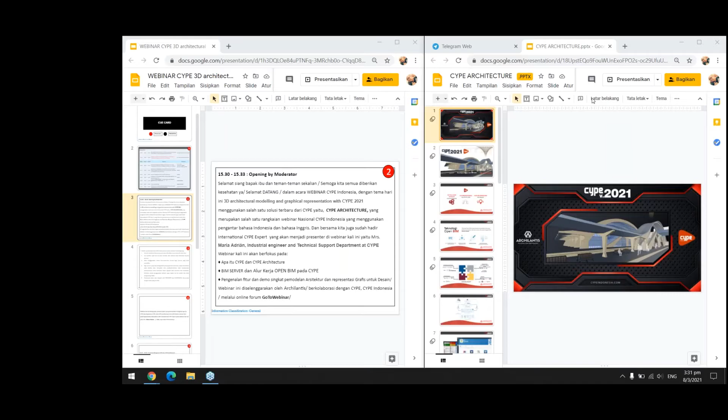Okay, it's okay. You ready? Can we start? Yes, I'm ready. Okay, whenever you want. So we start, yeah? Maybe in 5 minutes, if you want to wait 2 minutes. Okay, in 5 minutes we will start. Okay.

We are recording now. Second.

Okay, we are waiting while people log in. We will start in 2-3 minutes. Okay, fine. Yes, okay, 2 minutes.

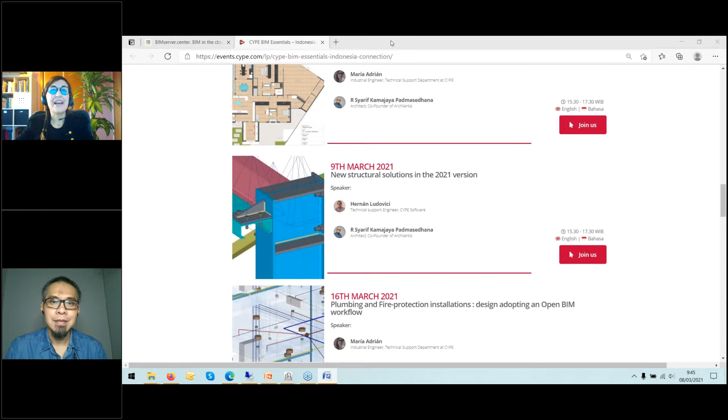One second, sorry, I have a technical problem here. Our architectural modeling program. Then we will talk about Open BIM Layout, whose main objective is to generate the dimensions and provide the layout of technical drawings using BIM.

First of all, I would like to show you how to download the programs. As you see in my desktop, I have CYPE Architecture and Open BIM Layout. But how do we get these applications or these programs that are completely free?

First, the only thing you have to remember is this address, write it again: BIMserver.center. If you come here, you will have access to our store. We press here, and then of course we can change the language. I'll change to English. All right, and here, if we write

architecture, we will find CYPE Architecture. We press here, and check it out. Here we have download. We only have to press here and download it.

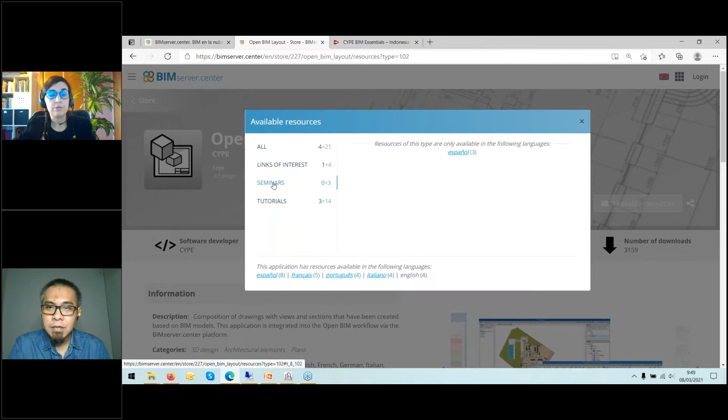Then if we press here, available resources, we have some videos explaining tips on how to do certain steps, if the tutorials have been made before.

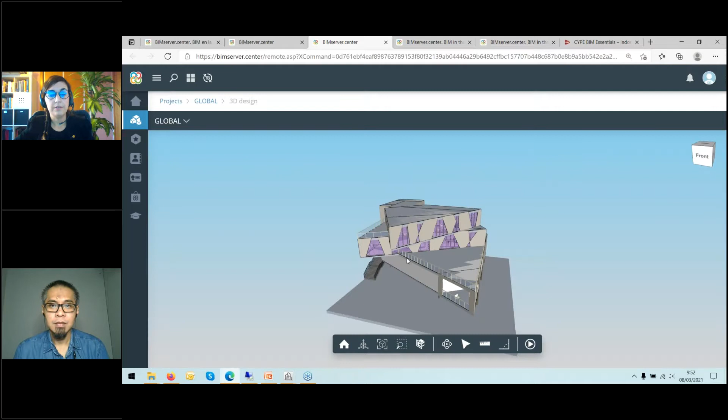If I press here on the name of my project, we can see here the 3D, and it has two IFCs, the one of the architecture, which I did myself from this part. I exported it from the CYPE architecture to the BIM project.

And then my colleague was doing the structure. So I can make it visible, see it at the same time, or maybe I want only one or the other part, make it transparent the way I want.

This, of course, can be shared with other collaborators. What I mean is that this project has a work team. In this work team, for now, it's myself and my colleague Hernan, who has the assigned area of structural analysis. But I could invite another user.

This user could be somebody from my suggested contacts, my list of contacts that I have in my account.

Or I could have different roles, I define the participation. They can be a guest that can only see but cannot make any change, or maybe I want a collaborator, editor, or moderator that can do anything. Depending on my objective, I can have more or less guests or moderators.

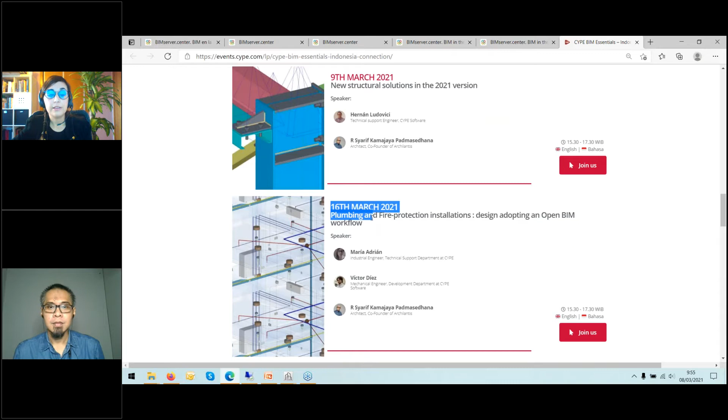So we'll continue with the examples. Just to make sure of the meaning of this, it will travel to the project and we will be able to see it in other programs, in the other applications. That's a part of the furniture. Let's go now to the sketch and architecture.

The sketch part is the CAD part, the drawings. You will find the tools you expected in a drawing program, like SketchUp or something similar. Talking about the tools: you have lines, arcs, quadrilaterals, circles, ellipses, polygons, and operations like extrude, intersect, copy, symmetry, things like that.

The sketch part is for when you are thinking about the building, or it can be where you draw elements like trees, cars, elements that are going to be shown in the model but not used for calculations.

Only for the plans. Maybe one example of the use of a sketch can be like this. I was doing some trials about a skyscraper just for fun, just an idea of what the sketch part is. When you're thinking about the building, you're interested in the shapes. In this example, I didn't create every floor—I was only interested in the shape it was going to have.

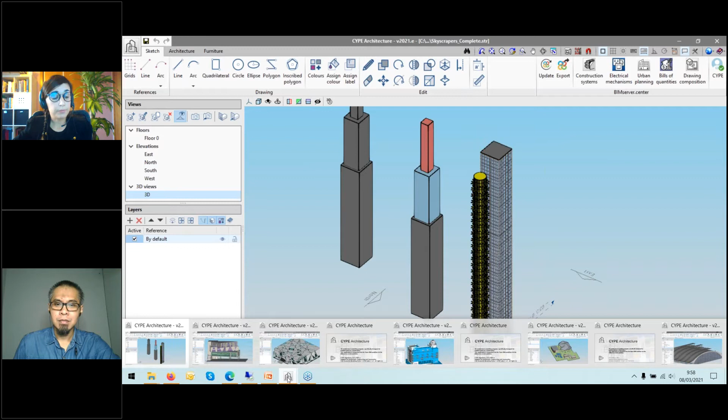That could be the result if I only do the sketch. Another example of the use of a sketch is for an architectural tender, something like this example—this is the Serpentine Pavilion. This example was done almost exclusively using the sketch.

In the layers, we can check this by pressing the button that shows or hides the sketch. If we do this, we'll see that almost everything here is a sketch. Only the stairs and the furniture are not a sketch. But it's fine if my goal is to make something that can be shown and used, for instance, for making this kind of blueprint.

I'll show it in one second. I prefer the Acrobat Reader, the way it displays with Acrobat Reader. Sorry about this, I have two screens.

Imagine I want to do something like this. This is done with the two programs I'm going to show today. The model was drawn in the sketch part, and then this was made with OpenBIM Layout—perfectly creating the sections, different 3D views, and things like that. So that could be the use of only a sketch.

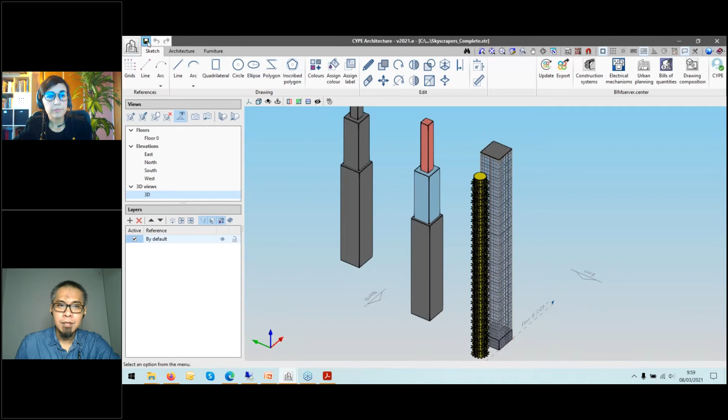Let's close these windows. You get a general idea of what I mean about the sketch. That could be that kind of example.

Then, in other occasions, we're interested in the sketch part, but also in the architecture. When we talk about architecture, we are not talking about drawings anymore—we are talking about construction elements, spaces, which means the building process is not finished with this step, but we want to continue with this model.

For instance, if I want to do thermal analysis, I want to calculate the loads of the spaces. In that case, I have to take care of the building—the composition of the wall, the volume of the spaces, this kind of thing.

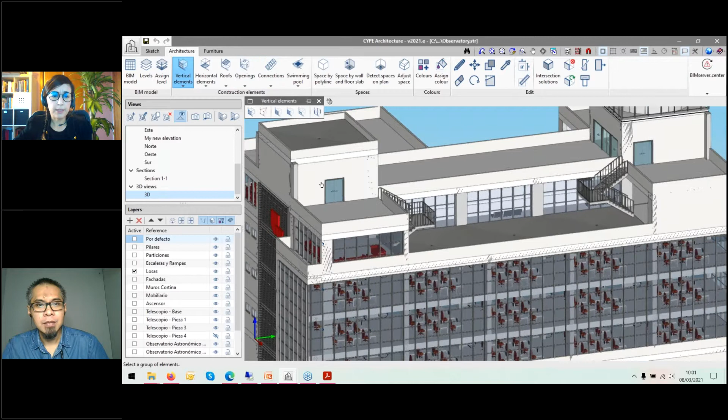So one way of working with this program is to begin with the sketch and then convert the elements of the sketch into architectural elements. In this example, we have used both the sketch and the architectural elements—we use the sketch as a help, which helps us draw the architectural elements.

Just a little view so you can see the kind of elements we can create—curtain walls, and all this. We edit, close like that. Just a general idea, okay, the railings.

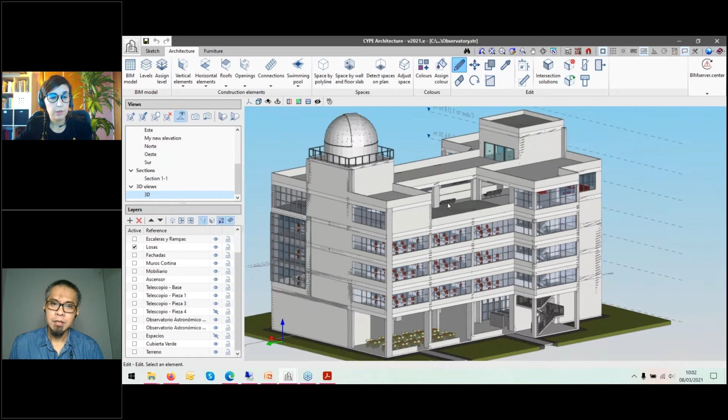Of course, in this program we have options like copy, which allows us to create one floor and then copy it as many times as we wish, so we can go faster. Just a general idea of what's possible to do with this. We can create these different sections and work in the different floor plans.

This is another example. Sometimes it's very helpful to use first the sketch, but then convert it to architectural elements.

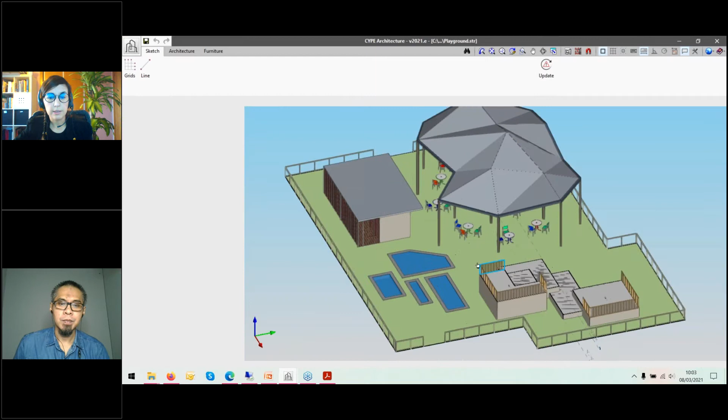Another example, like in architecture, as well as vertical elements, horizontal elements, and that, we also have swimming pools. In this case, it's nice, the kind of railings - you see the shapes that can have this kind of element. Well, only an overview of this.

I wanted to show you this in order to explain better what you get if you do this. This studio I'm going to use many times during the seminars, so we'll get back to it - we'll know this one day. This is the example I showed you before.

Here when we export it, let me try to explain what I mean by the IFC we get. In this example we use a sketch, but if we make it not visible, we can see the structure, the elements of architecture. So when we create, for instance, a wall, these properties are the properties that the IFC is going to have.

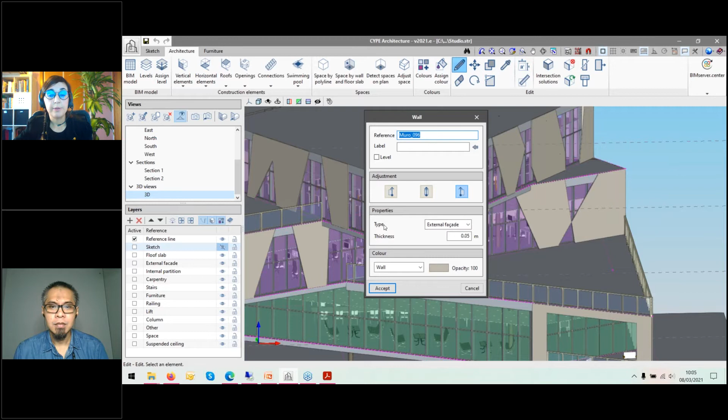If we export it to BIMserver.center, we will get an IFC, and I'm going to open it just for a moment. This program BIM Vision can also be downloaded from our website, completely free of charge. It's only a viewer of IFCs. If I press here to open...

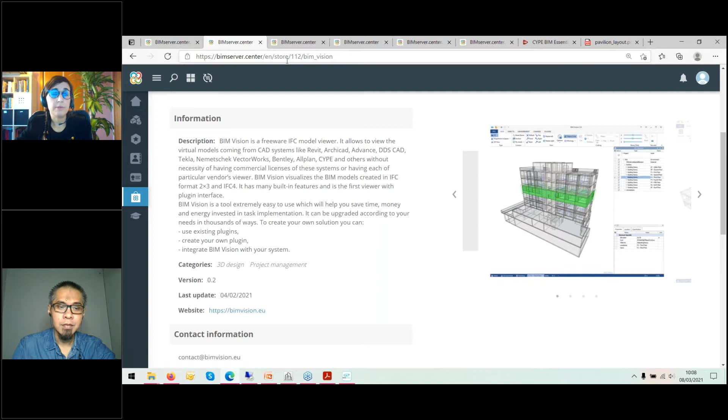Let's do this from BIMserver.center. What I would do at the beginning is come to my account in BIMserver.center, projects, and press create new project. I press here, and I'll write maybe 'from sketch' and the date of today.

Then I can select the different view options. In this case, visible to all users, so I can share it with everybody. Visible only in BIMserver.center, that's another option. I can select visible to my contacts - I showed you before my contacts, my agenda of contacts, people I usually work with - or not visible. Of course, we can change it afterwards. So maybe I can begin not visible, and then if I'm proud of my building, or I think it's something that should be shown, I change it to visible to whoever I want. Anyway, if it's not visible, it can always be seen by my work team.

Then the type of project: professional, test, or other, and the management of collaboration requests - if it's going to be open to anybody, only my contacts, or closed. I'll start in this case closed. Then I press create new project. Okay, here we are - we have an empty project, no files.

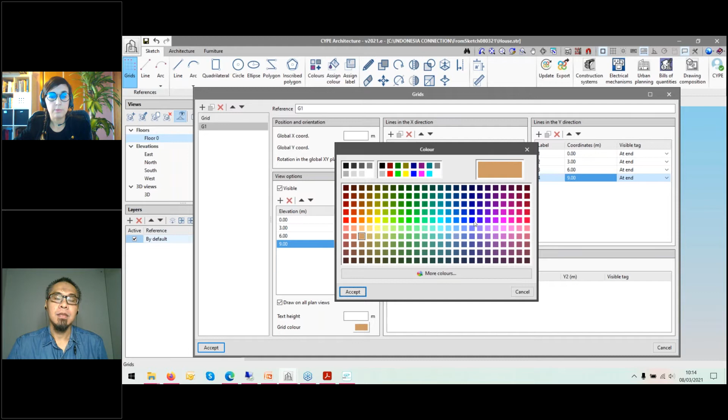So, 6, 9. We can change the color that will be shown. Any color we like. And this is important: the visible option. This is what makes it visible or not in the view where we are working. We can have many grids in the same file and make them visible or not while we're working. Let's see how this looks.

We accept. Here we are, we're in the floor view. Let's go to the 3D view. This will be our little help. With this, I think it will be much easier to create anything using those references.

I could do like that—I'm working in the 3D mode. I could do something like that, very easily.

If I want to go with more detail, because all of this is like a floor, maybe I prefer to do it like this—so these are different. I separate, or I can do like that. It depends on maybe the phase of the project.

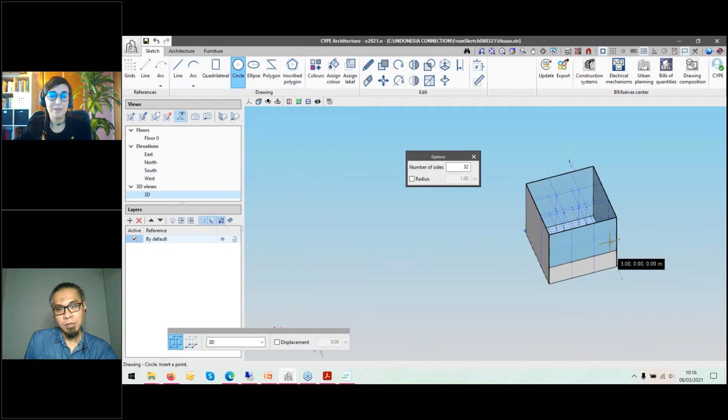Of course, you can use it in order to do other kinds of shapes—whatever can help us. That's a general idea of what we can do with the grid. Anyway, we can use reference lines or things like that.

In this case, I'm going to do an example without the grid, only drawing in the place I prefer. Let's make it not visible. Okay, now we are on the floor. What can be helpful is to start, because here we can work in many ways—we can work in the 3D directly, or we can work in different floor plans.

In this example, I want to work in the 3D. I would like to show you how you can work here directly in the 3D. Let's start creating a quadrilateral. Maybe this example could be a floor plan of a single house. Let's do the interior distribution and then create the real height, with the roof and all of that. Let's start with the sketch.

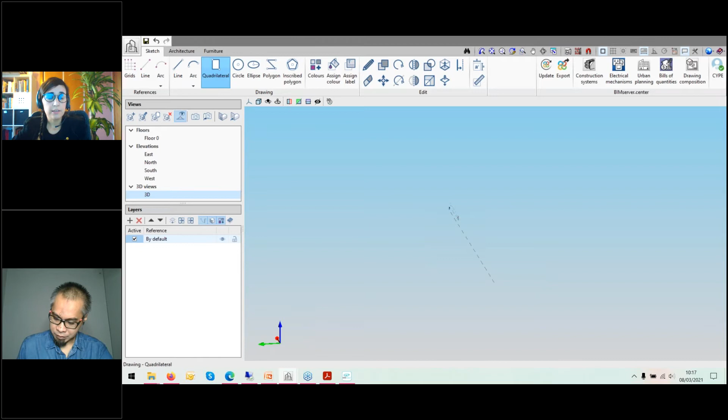First, to make sure I am on the floor, I can create this. Sometimes I like to use the grid in order to create my first quadrilateral and then continue. I'll do that this time. I can use a grid in 3 points, or I can use the diagonal. Let's start with this and then stop using the grid. Okay, like that, for instance. And this is my first room.

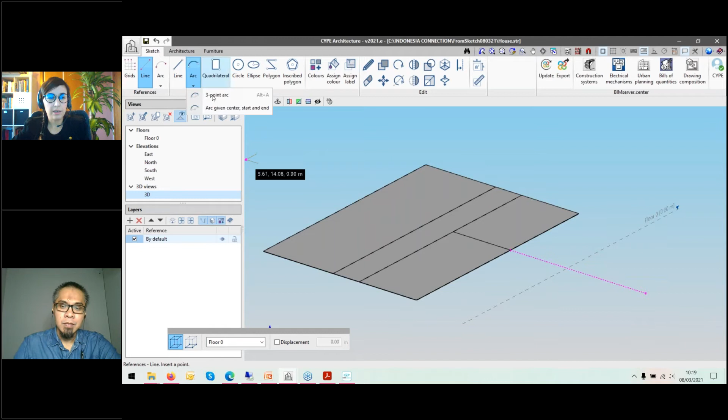Let's continue using this. Could be, let's see, maybe I want to, yeah, that could be nice, like that. And then let's use arc here. For this, I could use, for instance, a line. That's up to you, but I like using some kind of reference. Like that. That's the way this looks. That could be.

Now, what could be the next step? Let's give it a height. How can we do that? Well, before that, I want to show something important, because I want to extrude the surfaces, but in which direction is this going to extrude? Well, it depends on which side of the surface I am, because this has two sides.

So one interesting way of knowing which side I'm on is to create colors. The colors can be used for many things. They can show different materials - maybe one type of wall, another type of wall, bricks, things like that. Or maybe they show different spaces. That's how I'm going to use it now, for the distribution of a building. I want to separate the different spaces with these colors. Or maybe it's a big building and I want to separate the different flats, different for every user. So it can be used as I want. In this case, it also helps me know the direction of the surfaces.

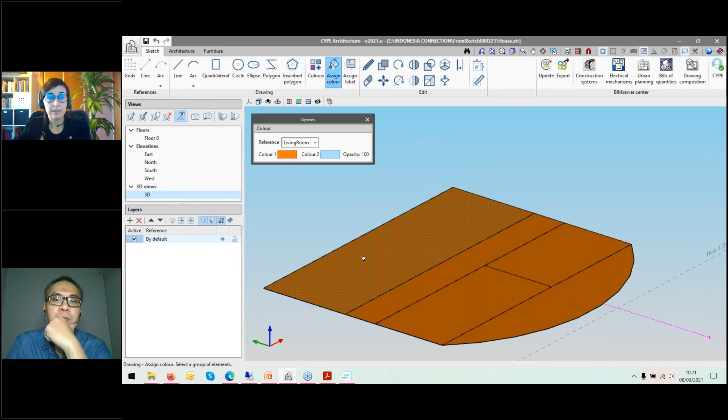So let's imagine this - just imagine - let's see how the distribution could be. Maybe this will be a big living room. Let's choose orange for that. On one side I'm going to do this, choosing the color I want, and on the other side I keep the blue. So I accept the color, and now if I assign color to this surface, they will change - this direction will be orange and then blue.

Let's continue. I can do the corridor now. Assign color. And then maybe I want to have the two bedrooms to be this color - same color.

And then let's have another room that is going to be the dining room. I'm going to do this with this color, for instance. Okay, whatever - this has no bathrooms, it's okay, just an example.

Let's see. Now that we have this, let's make it look nice. One thing that can be helpful - since I'm designing the building, I could stop at this step and show it to somebody who could tell me whether they like the distribution or not. So let's not spend a lot of time on this if it's only the first step. It could be helpful to create labels to show what I meant with the different spaces, since I said the names but never created any label.

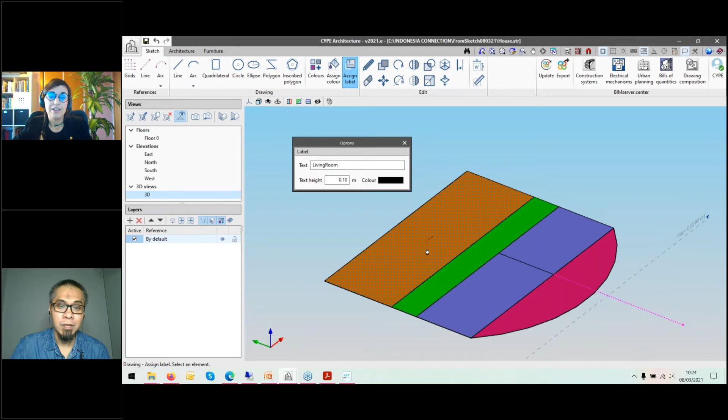So let's do that. I can assign a label. If I press here, I can say, for instance, living room - sorry for the spelling - is that one. If it's very small, I can make it a little bigger here. Okay, that's living room. Corridor, bedroom 1, and bedroom 2. Okay, something like that. I can show it to somebody, make different copies. Let's see, okay, like different - oh, it has a button. Let's make more spaces, whatever. Just a general idea of what we can do here.

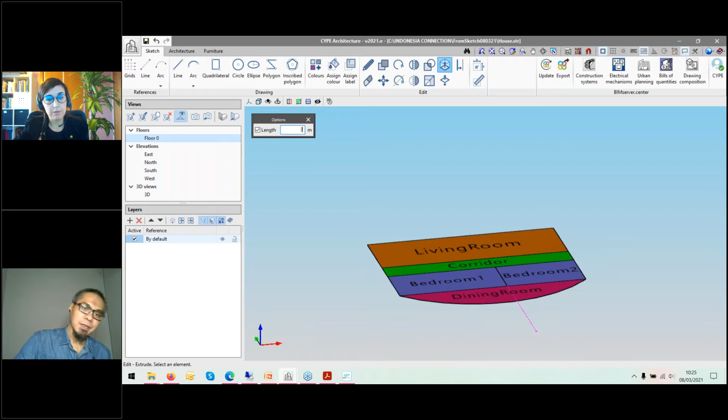Now, let's make it seem like a house. How can we do this? First, I would use the extrude tool. Let's use this - I can select here the length of the extrusion. 3 meters could be nice. So let's press here. Like that, okay? And now that we have done this, we can make the roof with another tool, in this case could be this polygon. Do this.

Okay, I use the different elements of this. This is an arc, but divided into many different segments. Anyway, if I want to see the interior distribution again, I can use this to hide it.

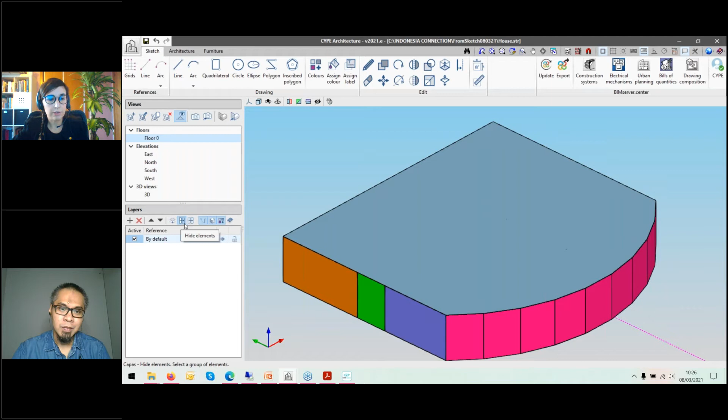It's not useful, sorry, this will only work for architecture. Okay, if I want to, I can have it. This is the 3D because...

I can make it with different transparency if I want, maybe here in colors. Let me check it. Yes, the opacity can be changed, so I can see this side with more easiness. Okay, something like that.

All right, so now, maybe, well, we are in the sketch all the time, and maybe this is a good moment. If I have finished this, the next step would be to go to architecture, because in this case, I want to make it as a real house. So how do I do this?

I go to the architecture tab, change it here, and at this moment, I think it's important to pay attention to the levels, okay? Because when I was drawing the sketch, I was drawing freely, only thinking about the shape, the different drawing elements. But now, if I'm really doing this, I want to create it as a real file that can be read by other programs for thermal analysis, acoustic analysis, or whatever. It needs to have those elements.

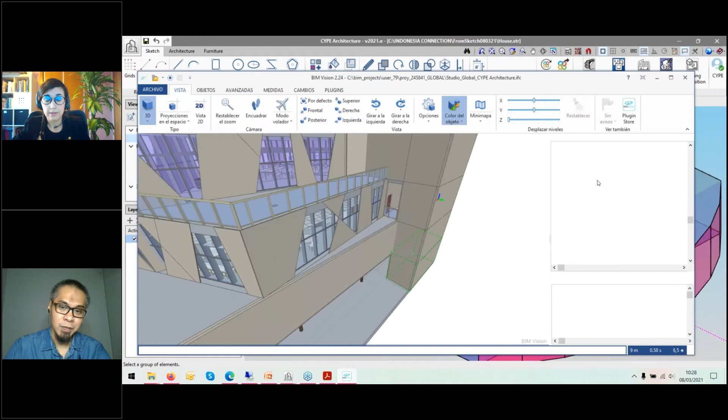So let's pay attention to that. Let's explain the levels and the floors. Because here, you know, we were working in 3D, but also had this floor view, but never really said how many levels you are having. Here it is very important in IFC that structure, the levels of the different levels of the building. Okay, so how does this work?

Anyway, always even an empty file starts with one floor view. Let's assign the levels to the floors. In this example, I would have two levels: the level for the living spaces, and then the level for the roof. This needs to have two levels.

So how do I do this? I come here, I change to architecture, press the level button, and here I will add the levels. Here I will create a floor level with 0 elevation. I'm not going to create a floor view because I have already created that floor view. Okay, so I only accept, and then add the roof level, which is going to be 3 meters from the ground, and I create a floor view. Okay, so now if I accept, I'll have the floor level and the roof level.

Let's save it. Here I am, okay, with my floor and my roof.

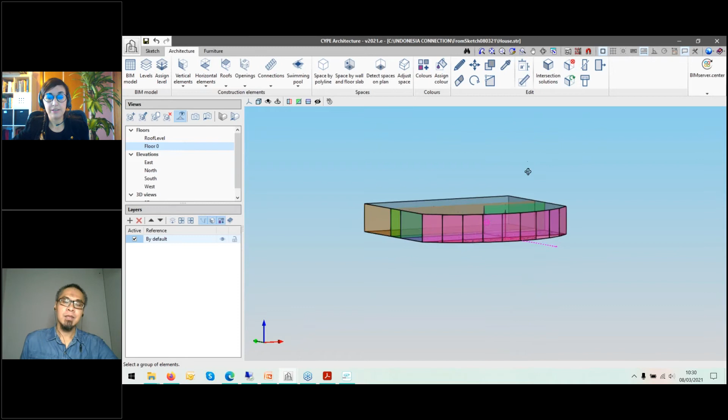Anyway, when you are in a floor view, you can also have the 3D, okay, I'm pressing—you cannot see this, sorry—but I'm pressing on the keyboard my shift button and then the wheel of the mouse, and I can work in the 3D even though I'm in a floor view, okay? So I can change at every moment. Sometimes it's more useful to work in 3D, sometimes maybe you will find it easier to be in a floor view. That's up to you.

I'll give you some tips about how I think is better, but maybe you will get another conclusion. Okay, that's up to you. Let's move on, I hope everything is understood. If anybody has any questions, please ask in the chat, okay, and I'll try to answer as soon as possible.

Well, let's make this into a real building, into an IFC construction. How do we do this? We will use these tools, the construction elements tools. With these vertical elements, we can draw walls, curtain walls, lofts, railings, the kind of things we saw in the examples. In this case, it's going to be a wall.

So let's press here. If we press wall, we can start drawing a wall in any direction we want. Okay, this can be done. I mean, we can start in architecture, but in this example, I'm going to use my sketch. So there's a very important thing, let's see.

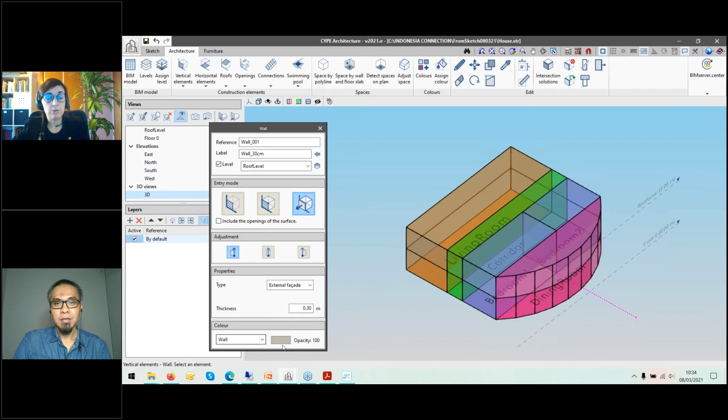I select the adjustment. Again, this is important depending on what you're going to do afterwards. The surface, that's all right. And the color of the wall can be changed afterwards if I want. Now that I've decided this, I only have to press in different elements.

And that could be the walls. If this is still having these colors, but if I press show hide sketch, now I have the walls. This is only a reference for me. And what could I do afterwards?

Maybe I can create the interior walls. How can I do this? These are dynamic menus, so there's no need to close and open again. I select internal partition, surface area. Let's check the level I want to use, the floor level. In this case it's going to be 15.

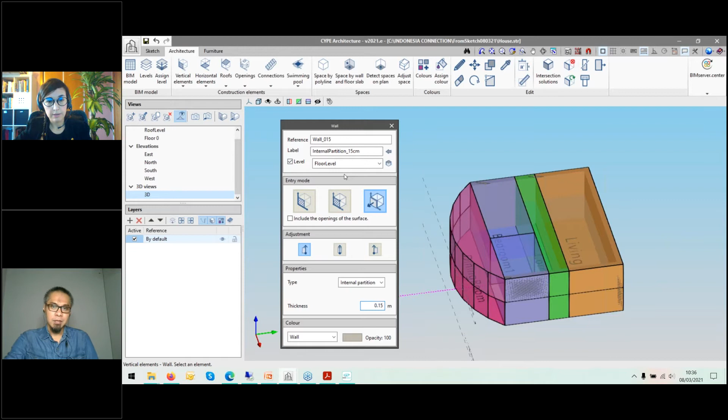Really, the important thing is the thickness I write here, not the reference, okay? But I like to do the best way possible if I can. Let's check this adjustment, that's okay. Do we have a... yes, that could be fine. And now we only have to press here. We convert it

to internal partitions. I usually like to check it, pressing here, just in case I have forgotten to do anything. I think it's fine by now. So I think I've finished with the walls.

The next step could be the horizontal elements. Now how can we do this? Horizontal elements, floor slab. It's important that in this case it's the roof level, and the label will be — I'm going to have only one roof, so that's going to be the name, the type roof. I do like this because I think it's better for me, and the color for roof tiles.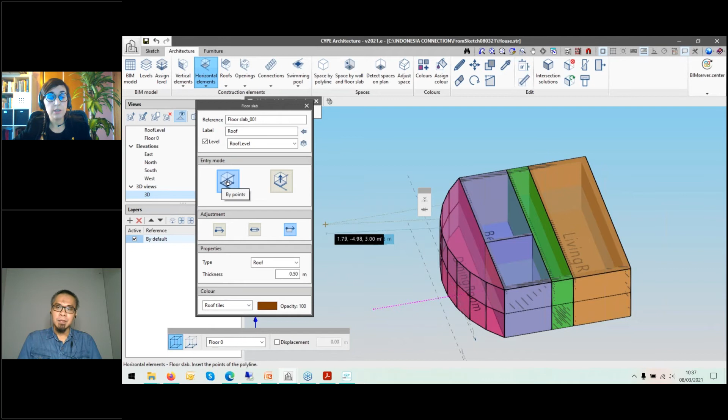If I do this by points, I need to be selecting the points of the lines. But if I do this it will be much easier. I only have to press here and get the different slabs, okay? Then, if I want to do the same thing with the floor, please don't forget to set this to floor level. Then this will be the screen.

Let's check this — change this, sorry. This per surface. This is starting to look better. Let's do this. Okay, I forgot one thing. This part is the last thing I wanted to do with this, because I want to show you how to convert it into a glazed surface. A bit more interesting.

Let's do this. I press here, and then there is this option in openings. We have a lot of options: opening, so a hole, a door, window, skylight on the roof, or glazed surface. If I use this, it has already some colors. I can create a glazed surface. It's in the floor level. Again, I prefer per surface — if I have done the sketch, it's better per surface, okay?

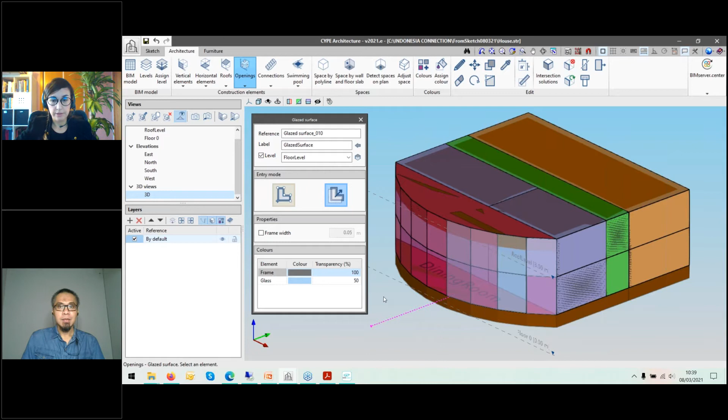And let's check, let's do this. We select different surfaces. And again, okay, so I make sure I haven't forgotten anything.

And then I could do, like, the final detail is to make some textures so it looks more like a building. Maybe I could come here, because like in here the sketch we made colors, but those were only for the sketch. Now we can go to architecture and select different textures or colors for the different elements.

Maybe I can come here, and instead for the wall, instead of this color that is a bit sad, maybe I can use this one, it's a bit nicer. Something like this.

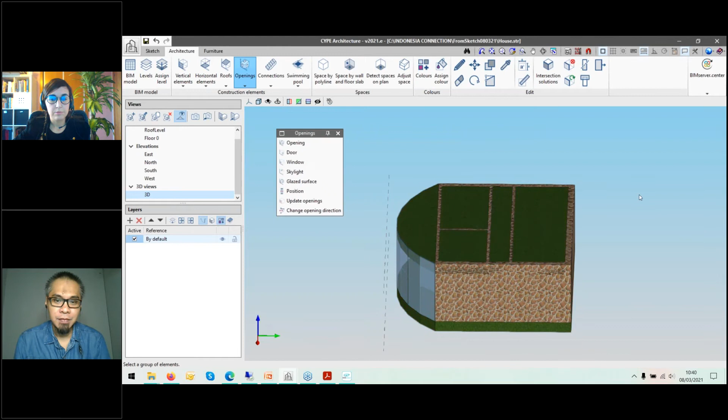Maybe I want to show here for the roof. I want that — something like that again, not the same color for this. I will choose another color for the screen. The screen is going to be gray.

So now that I've chosen only that — I know that's not very important, but I want to show you the tools, the use of the tools. Imagine I have changed this — how can I change faster to the others?

I could use copy properties. I select this, first copy properties, then the element I like or want to use as a model. And what do I want to copy? The color, in this case, the color, okay? The other things are already right. I do like that — right button, and that's changed. So that's about it.

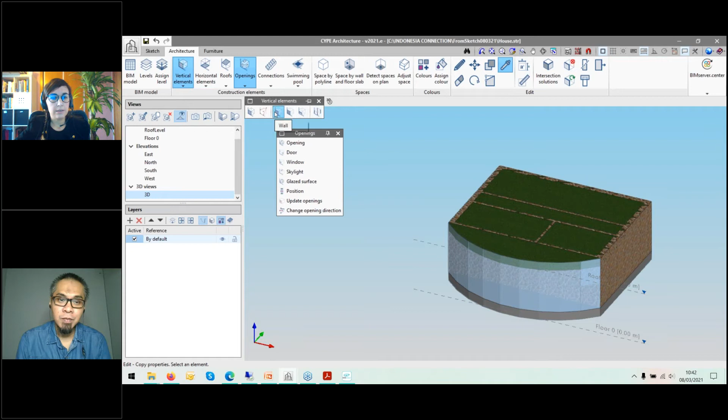Or maybe I could create some — let's see, a little railing. Sorry, yes, what I want to do is a railing, okay. Something like that. I decide where this is going to be. I use that — now I'm using the vertical element, okay?

Okay, I think that's about it. I don't know if they're going to give me a prize for this, it's only a little example, but it could be, well, 1 second.

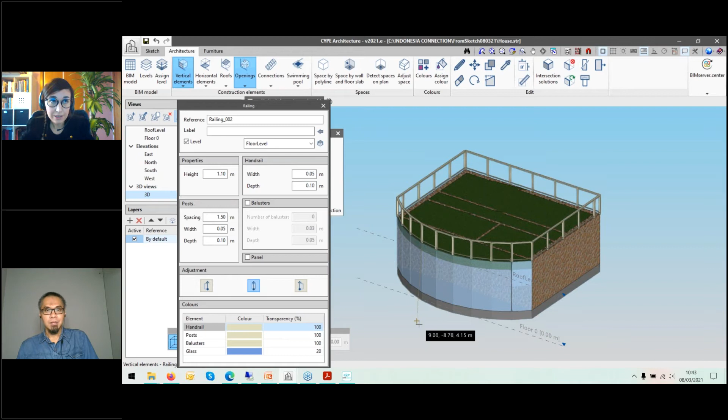I almost forgot one thing very important, the spaces. Because I have the levels, the walls, the screen, the roof, but I don't have the spaces. And the spaces are very important for other programs because for the analysis, right? So let's create the spaces. How can I do this? There are many ways of creating the spaces, and I'd like to show, if I can, the three ways.

Let's save it. Here there is the automatic saving options. I think it's a good idea to have this, that every 5 minutes the work is saved. And even you can use this, save after analysis or designing. That can also be another save option. Okay, so you saved your work.

Okay, so how do I create these spaces? That's the way, let's see. Let's do this, I come here in order to create the spaces. Either maybe it could be helpful to be in the floors in that view. I think that could be nice to be in the floor view because it's more comfortable. Okay, or I could be in the 3D view and start hiding elements, or the things that are not making me feel comfortable. Anything that's up to you, there's not only one way of doing things.

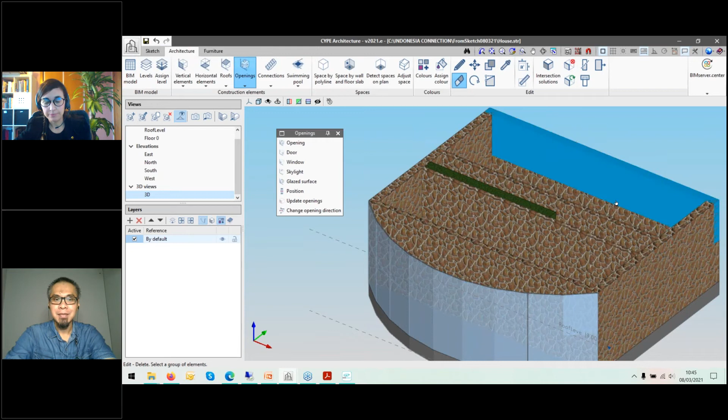I don't know what's this. Why have this here? Well, no, that's important. I have this green thing here. Well, let's forget this, decorate the garden inside the house. Okay, just something I did by mistake. Sorry. Well, how do we create the spaces?

Let's not forget what we were doing. The spaces can be created. The easiest way is this: detect spaces on plan. This is a new feature. I only have to choose the floor, the horizontal floor, and automatically the program reads the space.

Let's show it. I click here, detect spaces on plan, and then no plan. Oh, sorry. Well, if I try to do this, it says to be able to detect a space on plan, you must be on a plan view. Okay, so I always do what the program tells you.

Okay, let's go to a plan view, detect spaces on plan, and we said this was going to be the living room, so that will be named 'living', because maybe in other programs, maybe in CYPETHERM EPlus, I want the living rooms to have certain renovations of the ventilation properties or whatever. So it's important to give a proper name. That will be the living room. For the space we can use the reference automatically made if we want, but that's important.

It's indoor, yes, and the height will be that. Okay, that will be fine. So now, because I only have to press here, and automatically get the space. Okay, so I think that's a good feature, that's what I said is a new feature.

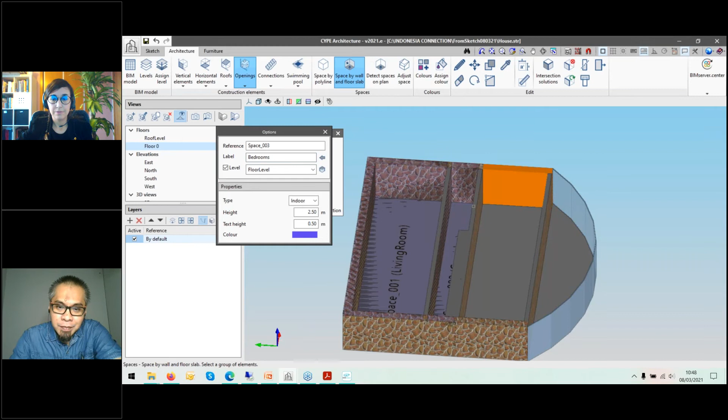What did I say, for the bedrooms? In this case, it's wall and floor slabs. First, you have to select the walls. Maybe I can rotate a little bit. And then, when I'm finished, the floor. And that's it.

Okay, that's another way. And another way is by polyline, which means that I'll do that, I'll show you. I check space by polyline. I give the name.

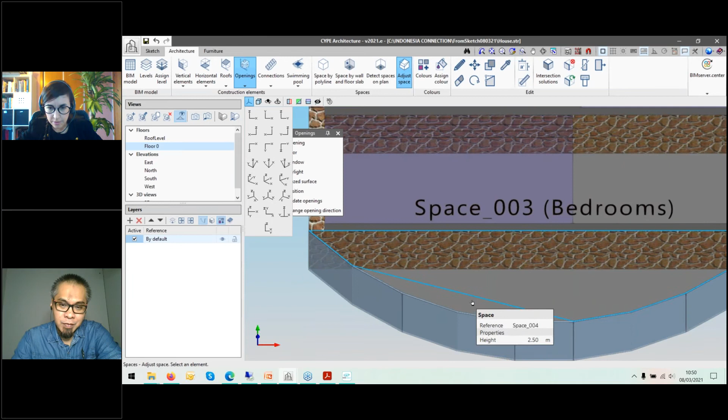Level. And then I have to, maybe in this case, it's better to be in this view. Okay, and I choose all the elements of the polyline. Stop, that didn't work fine. Okay, you see this? Maybe I can adjust the space. Let's repeat it. That's the way I show you, to check how the space was made, okay?

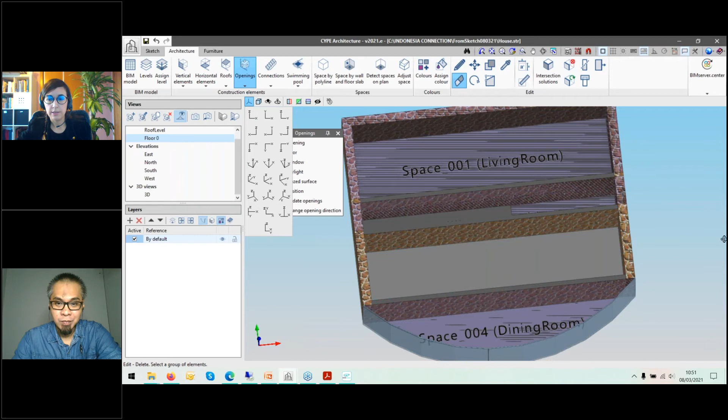If it's on the surface or the volume or not. In this case, let's repeat it. And something happened with this, because this has two tabs. What happened is that it's separated into different surfaces. So if I only check one of the floor slabs, it doesn't work. Let's see if I do this better this time, and if it doesn't work...

Okay. And then when I finish this, now this went fine, okay? That's it. Well, now I think we have really finished this part. So I think this could be finished, if I haven't forgotten anything.

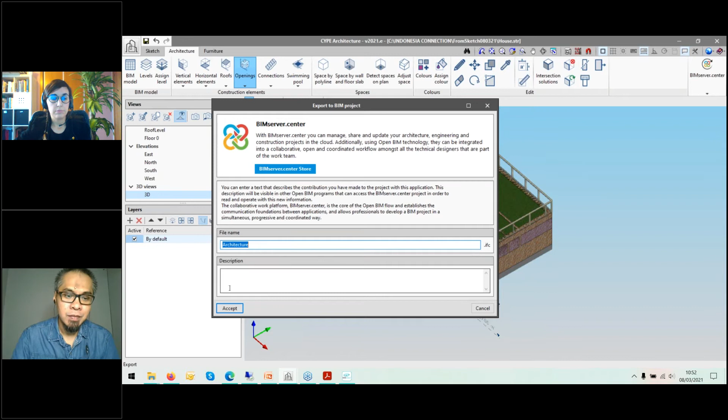What can I do now? The next step will be to export to BIM-server.center. So how do we do this? We come here to this option, BIM-server.center, and export. We can choose a name for the file. That's right for me, I accept. In this moment the program is exporting the information to the platform. This was fast, and this is also saved in our computer, that's important, the IFC.

Here in the synchronizer you can check the path where this is going to be saved. So anyway, we can find it in our computer also. But export finished, okay? What I wanted to show you now was how this is uploaded to my account, BIMserver.center, or the account of my work team, if I had one. Let's come here. It hasn't yet, okay, it's uploading now. If you see, there's a little white arrow, which means this is loading, though it's very small and hard to see.

Anyway, you can see here, read it here, that in this moment the process is happening, yes. Well, time has gone very fast, I think I only have half an hour left, so I have to go really fast now. Let's see, well, this is finished. So now if I come here, I can see here, last change a minute ago. If we come here, okay, we can see our design.

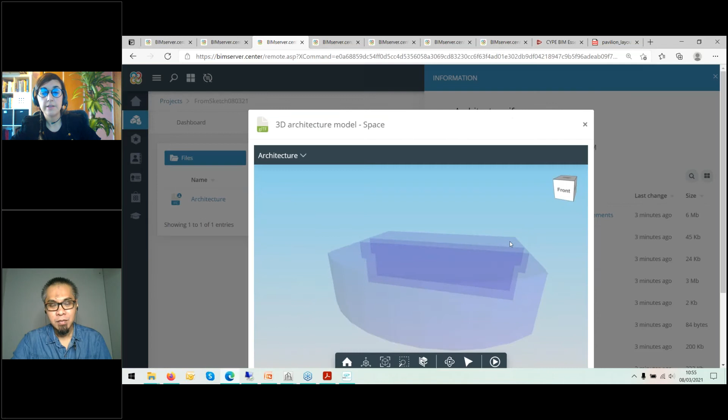What I think is interesting is that we can share it, we can share it with the developer, we could. Okay, this is only starting, but we can add more information about the building information, building services, the structure, etc. That's the way this works. Here if we come to files, now we have the IFC and also all the information of the construction elements, the spaces, the 3D of the spaces. That's why it was important, the sketch, but also the construction elements and the space information. That's what is going to be read by other programs. So, hope this was understood.

One thing I want to say very fast, but I think it's important to know: all this example was done in 3D, but maybe some of you prefer to work in 2D, the more classic way of working with a template given by somebody else. This example I tried to make as if I was the architect, starting to create a project, thinking about the building, the different possibilities, and showing it to somebody, things like that.

But maybe the case can be another: maybe somebody else did the drawings, and I'm asked to do the analysis, but I want it to be in an IFC format. Maybe the architect has given me the DWG or DXF, not in an IFC format, and I want to start a project that can be used and read by BIM programs. So how could we do that? I'm not going to do the whole example, only the beginning, because I think it's interesting. So how could we do this? Here in the project, I could say...

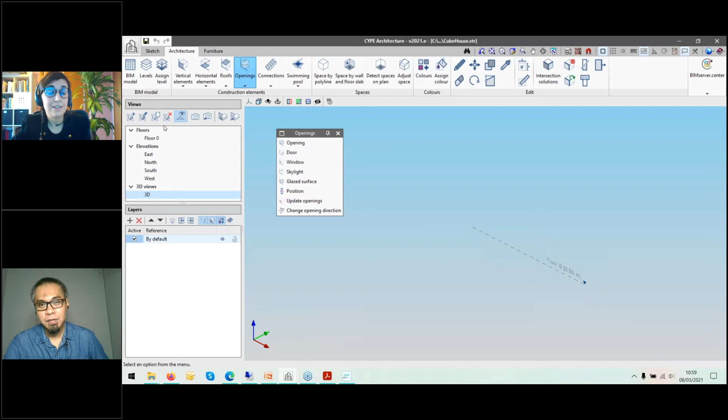In this moment, I start with the levels, deciding them. For instance, here I'll do this in a different way so you see the different ways of working. If I come to the floor that's already made, I can come to edit and associate floor 0 to a level. Well, sorry, I'll do levels first and then associate.

I can do the level, the first level will be the floor level, and I want to create a floor view from the beginning. Okay, I want to do this. I'm going to delete this and start from scratch. I prefer it like that, I think it will be easier to understand. Let's do like this, I delete and then start with levels.

I'll create level 0, create floor view, accept. Level 1, 3 meters elevation, create floor view. Then level R, level roof, for the roof level, elevation 6 meters.

If I do this, automatically I have three plans, three views, horizontal views of the different levels. That would be, I think, more understandable like that. What do I do now in order to link the drawings to the levels?

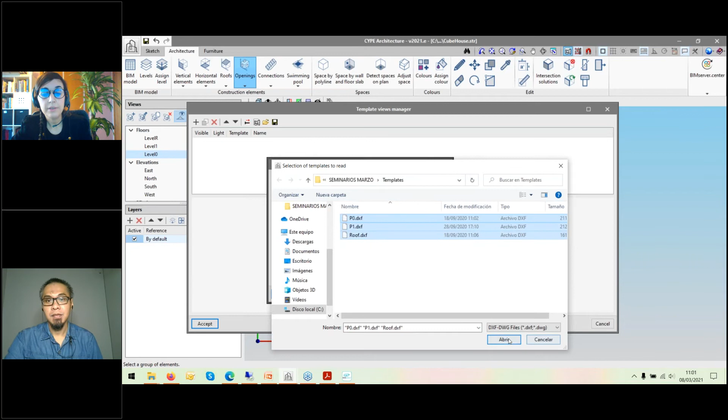I use this button here, the DXF DWG template button. Here, oh sorry, the other one, the same but in white. Okay, here, that option. I press here, then add, and it comes to my templates because I already did this before. But if it wasn't the case, I would have to find my templates. All right, this is what I was given, this DXF. I select them, open, accept.

These are the DXF files I was given. I only have to accept and then associate the different floors with those templates. So here, if I'm with level 0, I come here, to this button, and select this view.

Here I am. When I'm with level 1, I press here, see this? And now in level R, for the roof level, I press here and select the roof. So here I am, now it's very easy to start drawing.

I go to vertical elements, I'm working in the floor. I come here to wall. I know, as I want to go fast, I don't give a label. I select by polyline and start drawing.

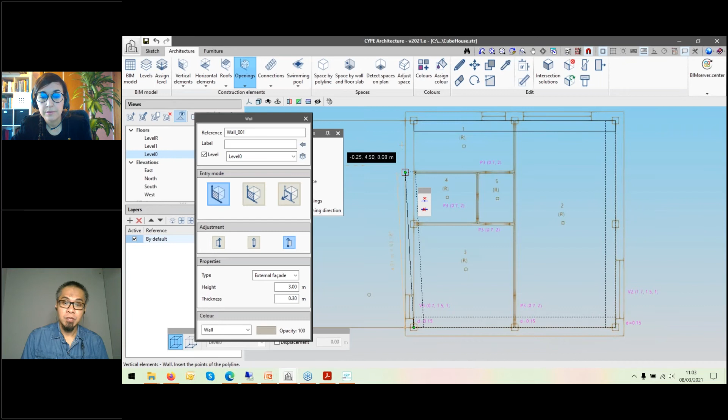I can use this capture, the template object snaps, which allows me to choose the points of the template. So I did this, and of course I can change to a 3D view, and that's what I'm working on and doing. So it could be the same thing, but in this case, drawing directly the construction elements in 2D.

I'll stop here because I want to show you the OpenBIM layout program, but I hope everybody got the idea of what we can do in this program.

Let me... yeah, one second. Hello, yes. Is everything fine? Fine, thanks. Okay, one second, because now we are going to change the program.

Okay, let me check that I have explained everything I wanted to explain. Okay, so I think that's about it.

In the case of now, let's change to OpenBIM layout, which is a program for drawings. I think it's important to know what we want to get with OpenBIM layout. What's the objective of this? The objective is to get a drawing, a blueprint of our model. It could be DWG, DXF, or PDF.

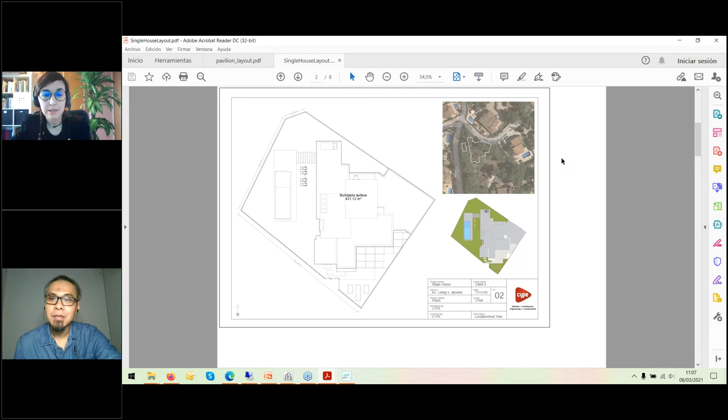It's possible to add files, not only of the BIM model we made, but also other files. So that could be the plan, the place where it is in the parcel, where the parcel is. And that's the floor plan, another floor plan generating the surface table.

Another example, this one with a section, the longitudinal sections of the house. These with some monochrome images, another from the interior. This would be, I guess, the classical use of the program, maybe the plans you have to get of the house. But it's also possible to create something more aesthetic.

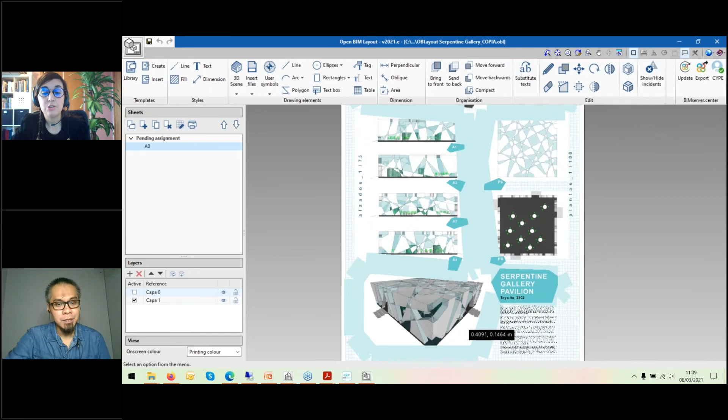For instance, I'll show you now this little example, okay? Because that could be for an architect or a tender. So using drawing elements, you can add these kinds of lines and be a bit more creative about the format of the different elements. And also add the 3D view of the model.

That's only a little example of what you can get. Now, another thing, maybe I'd like to show you one example that is already in the program. Let's see, one second. Here.

This is the one used to create these drawings. Let's open this. And then afterwards we will do it from the beginning, using the one we created with CYPE Architecture.

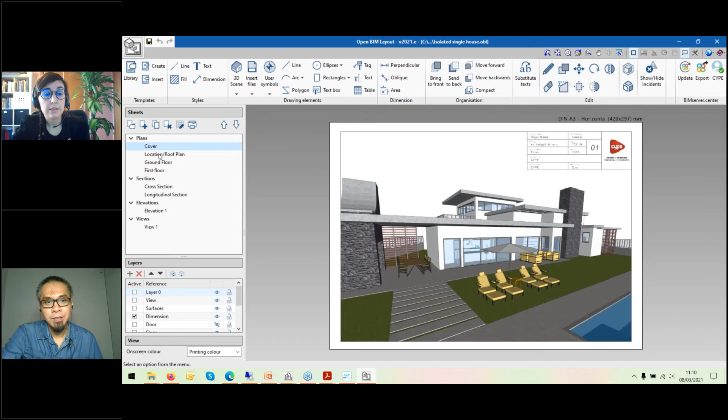That's only to show how the PDF I showed you was created with this file, which you can open if you install the program, so you can check it out. So how they created the different plans: the cover, the location, the different floor views, the sections, that kind of thing. Again, here in OpenBIM Layout, we have layers as well that you can make visible or not visible, etc.

Let's see, I'd like to do an example from the beginning, so when you use it, you know how to start. Because this one is finished, and I'd like to explain how this works. So let's close this to be more comfortable.

I'll try to do a little bit of what we did, and I'll explain what we did. Here in CYPE Architecture, we exported to BIM project, remember we did that. So the next step will be to do the drawing composition, so we'll do the OpenBIM Layout. All right, I'm going to explain it that way.

But OpenBIM Layout reads information not only from CYPE Architecture, it can read information from any project. So it could be, for instance, uploaded by IFC Uploader. You know, this program is for any IFC we've received, we can upload it to a project, and then OpenBIM Layout will read it.

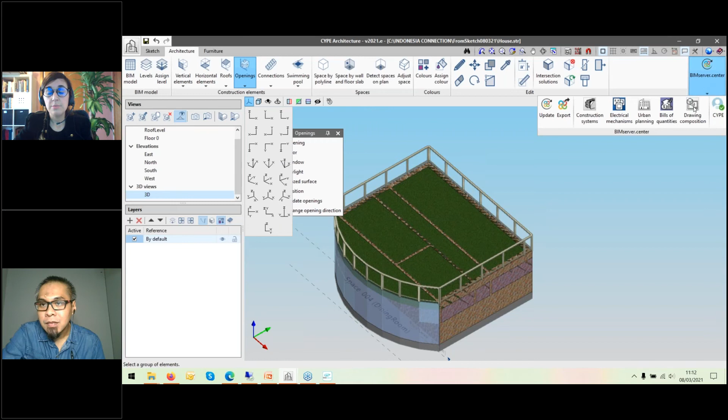How do we do this? Well, here in BIMserver.center, I press the drawing composition button. If I do this, again, the name is okay, say yes. And what this is going to do is create the IFC and it will open the program. This opens the program for me.

Now I say new. I select the folder. I think it's better if I choose the same folder, so everything is in the same place and I can find it easily. Remember, we were in the example from Sketch, that was a sample from Sketch. Let's come here and give it the name 'house layout.' I'll accept, and now I select the project.

From Sketch, accept. Next, because this is important, okay? Which files do I want to include in this file? This one from CYPE Architecture. I could have more. Finish.

Here I am with an empty file. Anyway, things that I think are interesting. What I think is more interesting to know is this: the 3D scene. Because in this button is where we really say what we want to read from the BIM project, okay? So for me, that would be the first thing to do, to come here to 3D scene. Again, that's my point of view, okay?

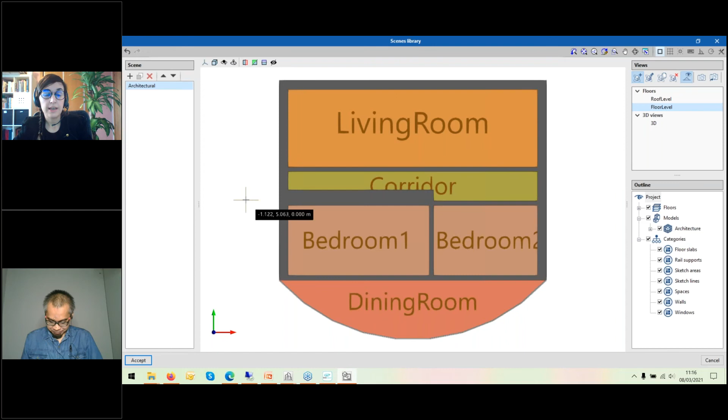And then I have to say from where I want that elevation to be. Maybe I want this. Let's wait a minute, one thing I want to show you afterwards. One second, please. It's important to finish, okay? I have to say from where and the direction, the perpendicular direction.

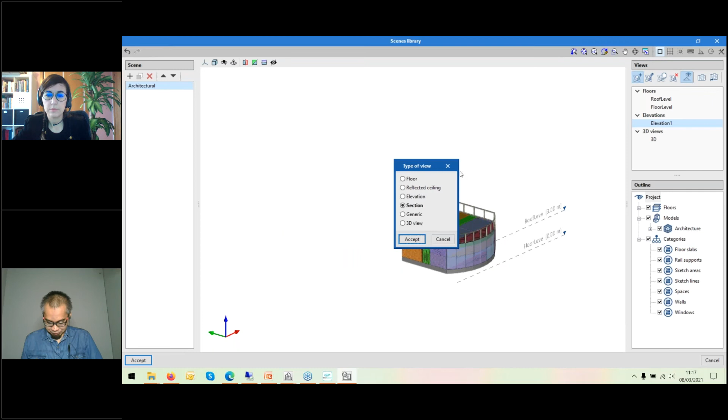Accept. And here I have one elevation, right? And then I could create different, maybe I want to create a section. Here to here, or maybe with this. Okay, like that. Okay, and I save it.

Okay, so that would be the different options. One thing that I want to explain is that I can change on the side what I want to see or not see. Maybe I don't want the sketch to be seen, so I can unselect it here, so then this will not be shown.

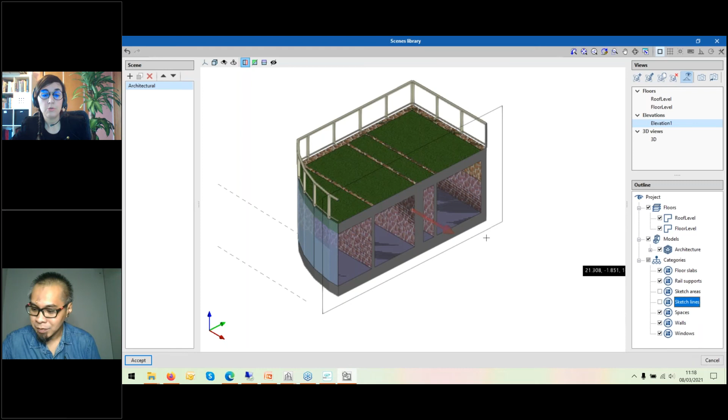So that's important. This is a very simple example, what I did was very simple, but it could have the furniture or it could have more information. So I could have plans only with that information or whatever, okay? It's only a little example.

Okay, what do I do now? Now that I have decided the scenes, as I say, this is empty. One important thing is that I can have templates of the different formats. In my case, here in library, I can import a template I already have of an A3.

Second, like that, okay? I have a template which has also different substitute texts. So I can go really fast changing one, and what displays the name will be changed to my project. I'll explain it later, okay? I'll go back to that later.

The thing is that we can create templates. These templates can be created with our own program, okay? With the drawing elements, that was how these were done, all right? With using these tools, like with an empty sheet, we created a template.

So now that this is done, all of the things I want to explain are the styles that we can have: the different lines, thin, normal, thick. Then of course we can change the type of line, the scale factor, the pen thickness, the printed color and identification color. On the screen we can see the printing color or the identification color. Maybe we don't want so many colors seen on the screen so it's more simple, but in the printing we want another. In my case I prefer printing color, so I see the final result.

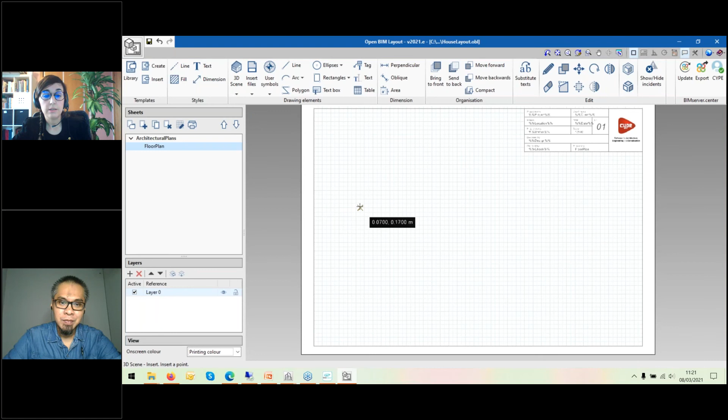I say the space I want this to be. I don't know, it could be like that. Okay, and now I can decide what I want to see from the scene.

And choose this. The scale, it could be depending on the zoom. This means I can change it with the mouse of the computer, or I could choose a predefined scale. We have different options, or imagine there's a specific scale that I don't find, I can write it.

Okay, anyone. Maybe I choose depending on the zoom. I can choose this. Of course, here I can even rotate it or do whatever I want. I could choose normal image or monochrome. Maybe I prefer monochrome in this case.

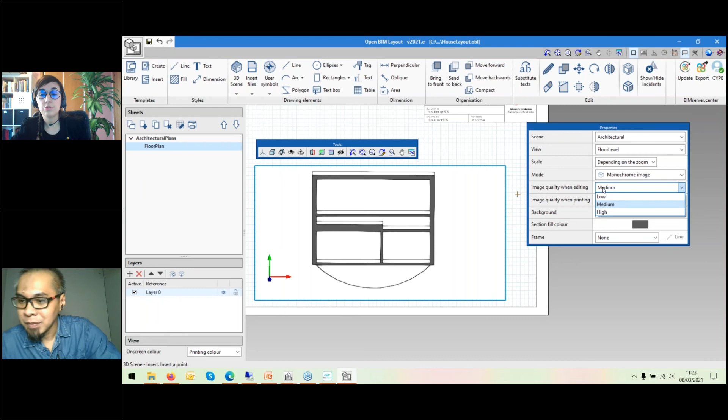I can choose the image quality when editing, here in my computer, or another for when printing. That's important if my computer is a bit slow, maybe it's better to not choose a very high quality here, but the important thing will be the quality when printing, and that's quite good.

And of course, the kind of background we want. When we have finished, we press here, and we get that. Okay, also we can add any. See, maybe I want this, but also this in the little space here.

I want to add the 3D. Okay, so we keep in mind the general idea. Anything, I could add a text here.

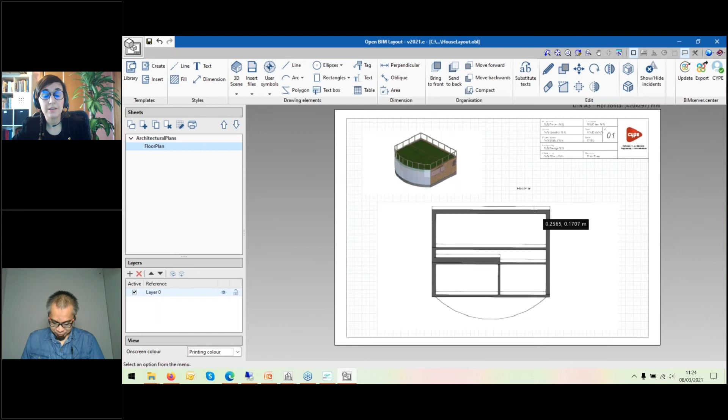One thing I don't want to forget to say, because I think it's a good option, is this, the tag. This allows me to get the information of the IFC. So this is not only a line with a certain thickness, just a drawing, it's more than that. If I press here in tag, and then here,

I get the information from the element, the constructive element. This could be done with this, but also it could be done with the furniture or maybe. Remember we selected different thickness for the external wall, the facade, and the internal partition. So that's what I get.

I could get more information on where the sanitary appliances or anything are. So that's not only a drawing, that's a lot more than that because it has a connection with the BIM project.

I only have five minutes, so I think I cannot explain much more. Only a minute, give me a minute please. The two things I don't want to forget to say.

One is the user symbols that you can draw, for instance the north, to say where's the north, or anything that you like to add can be added here. Also files, we could add, as I showed you, like the picture of where the building is going to be, anything. So not everything has to be done in this program, you can do it from here.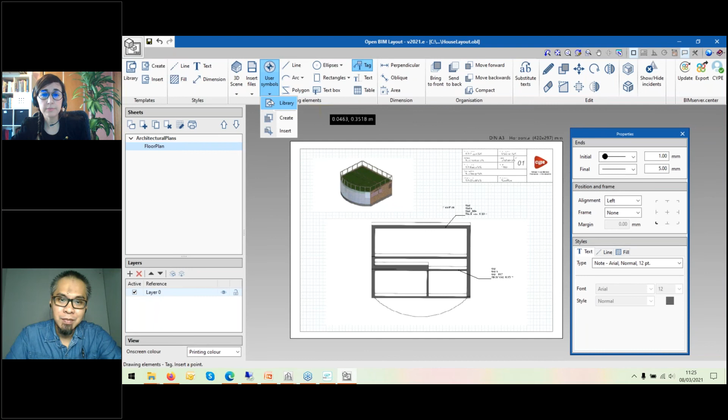And another thing that I think is very interesting, well, the dimensions, of course, you can measure things here. Another thing is the substitute text option that I think is very useful because it allows me to go very fast. Here we have this, like it names the number of sheets, for instance, or like that.

But also, what I did here with the template, if I import my template, select all, this allows me to go very fast, like creating, you know, the status. Maybe I want to say that this is not finished, this is the first phase.

Please. Okay, if I create here first phase, this is changed here. And of course this is a very small example with only one sheet, but imagine we have created 20 of them, using this here and also in the different texts there. Okay, here I can use this.

This is something I like, so that's why I want to explain a little bit. If I use this, I can copy. Let me see, I copy this, and then I copy the text, sorry. And then I can use it any way I want in the program.

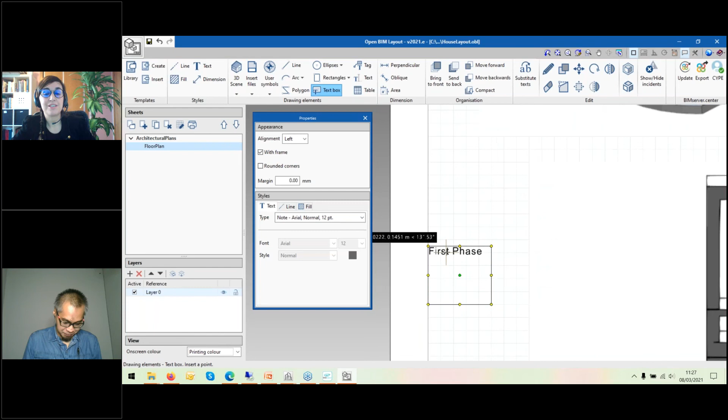So what I write here is replaced. First phase, for instance, is replaced in the different sheets, so that this kind of features, all right? Well, I think that's about it. There were so many things I wanted to explain. I hope you got a general idea of what can be done. And of course, if you have any more questions or requests, you can find us at support.cype.com.

Okay, so Ivan, I cannot see. Well, thank you for attending, thank you for your time. I cannot see any question in the chat. Yeah, I can see the question too, but the question is just only for us. How to ask? Okay, so for us, for the attendees, can see the attendees first the question. But I can see the chat, but only your question. So, well, anyway, if there's any question about anyway, attendees, maybe it will be the question from the attendee.

How about to make the presentation like a pavilion, like a usual presentation in OpenBIM layout? How to make it? This is what we used to show, yes, the standard one of the presentation of the OpenBIM layout. How about the pavilion ones? How to make them? The other, like, okay, the pavilion ones. Sorry, I want to make sure, this one.

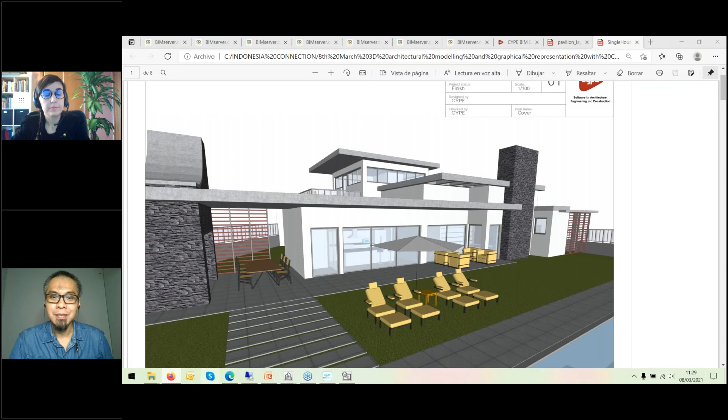The difference is that IFC Builder can be also downloaded from our store, it's still available here. In this program you work always in 2D, you generate the 3D, but the way you work, let's see if I can make it a bit bigger. In this case, the way you work is similar to what I was explaining about how to start from a template. So you work in 2D, and of course you get a 3D view, but you don't have all the possibilities of designing that CYPE Architecture has. So I mean, CYPE Architecture is the evolution of IFC Builder.

That could be an explanation. Well, one advantage of IFC Builder is that it has two steps: it creates the architectural model and also the analytical model, which can be useful for other programs. But CYPE Architecture has a lot more flexibility in the design options.

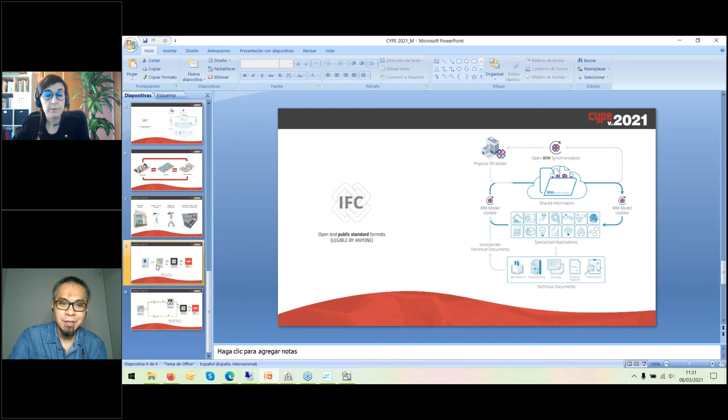Vicente, any more questions about the Revit plugins? Any more questions? The other way, because there are a lot of ways of working. In this case, I was explaining when you start in this workflow, starting with CYPE Architecture, all right? But we could start with Revit. In this case, yes, because this represents the CYPE programs, right? It could be OpenBIM layout, for instance. How do we get this?

If we have Revit, what we can use is the plugin here in the store. Let's see what. Here, plugin OpenBIM Revit, that is also free. You can download it, and if you have this installed in your Revit, you can create a new OpenBIM project from Revit. So very similar to the steps we made when we created a project from CYPE Architecture, it can be also done from Revit.

So we start the project in Revit and then continue with our applications. And another possibility is that you want to start with an IFC that is created by Revit, but you don't have Revit. In this case, the way to work is with IFC Uploader, that allows you to start a project with an IFC. You create a project in BIM Server Center and then add the IFC to that project. And then you can continue with the other applications.

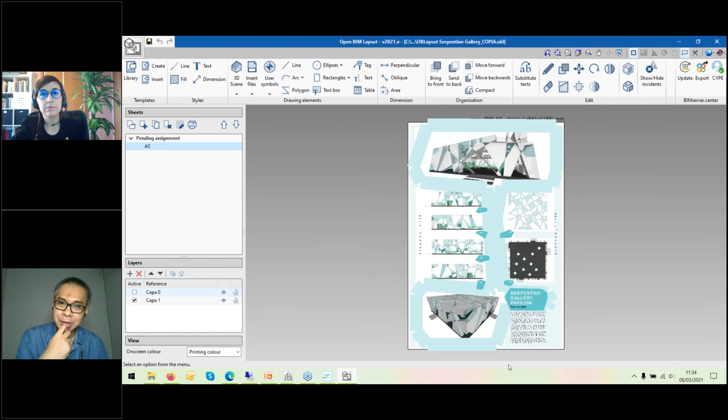The IFC? Yes, you could start with that IFC and the OpenBIM Layout will read it. Totally, no problem, okay.

Let me show you the pavilion like I asked before, Maria. Okay, yeah, you mean about this? How to make it? Yes, maybe it will be interesting for us in Indonesia. This was done by one of my workmates, so he's very talented, I think. I was impressed by that.

So that's the question I had: how did you do this? He explained it to me. The way to do this, one part that's interesting to know is that this is a combination of drawing elements, the elements here, and also the different 3D scenes.

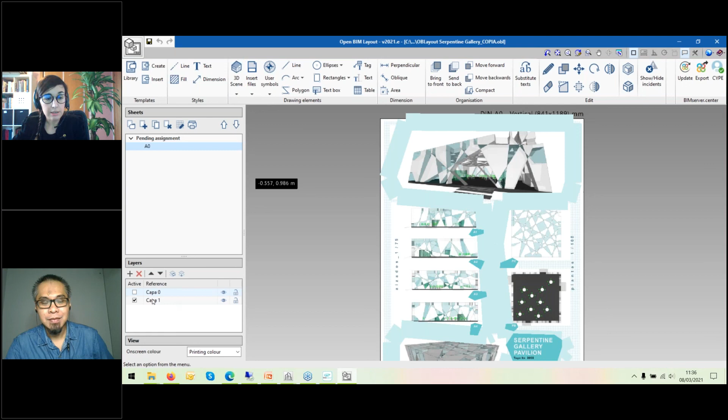So here you see the layers. I could unselect this layer, so I'm not seeing the 3D scenes. So that's the part of the drawings.

So what he used, in order to do this for different lines, he created a special type of line with a lot of thickness. So here, in the styles, he created a special line with this thickness. This is nice because here you can see these little holes, but then in the PDF it's not seen like that.

Of course, he admitted that he spent time doing this, okay? It wasn't automatically done. You have to try, but you see this, I think it's a pretty good result. So this part was done by lines with that special thickness and color. And then again, this was done by drawing with these polygons, only doing this kind of thing.

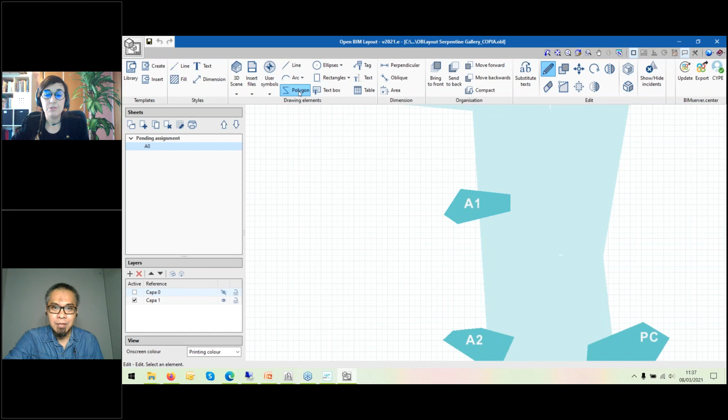And this, okay, we have these two types of text. This one is very simple, the text tool, you only get one line to write. But with the text box, you have more options, like the paragraph and all of that. So he used these drawing elements, and then made it a bit nicer, like with a special separation. That was what I meant with the text box, you have more options of how you want this to be read.

This is the most important part, maybe this concept would be added here, because the different sections and all of that were done here in the 3D scene. This is the one, because when you come here, it's only the dimension of the result, but what is more important is this. In my little example, I did two squares, or two 3D scenes, one for the plan and then another small one.

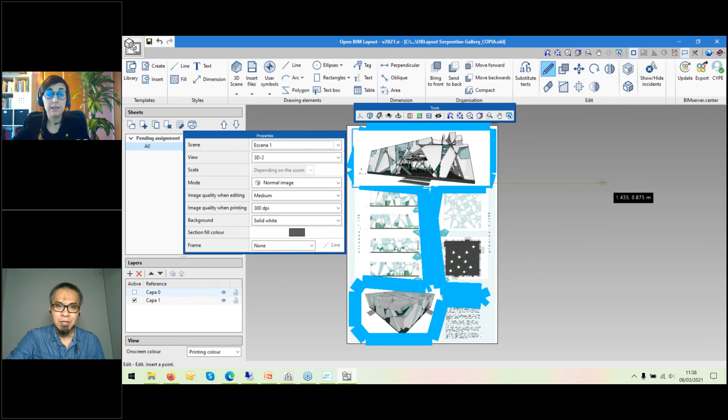But here there are so many of them, okay? Every time you see this, it's because he created a scene that you can make changes to. So how did he make this? If you come here to see the scene library...

There's one scene, and here there's the floor views, the different elevations from every side, and one section. We could create as many as we wanted, okay?

And in this case, everything was added, but we can do it without the furniture, with the furniture, okay? If we create a copy, we could create this with the furniture or without the furniture and change it, use it whenever we want, okay?

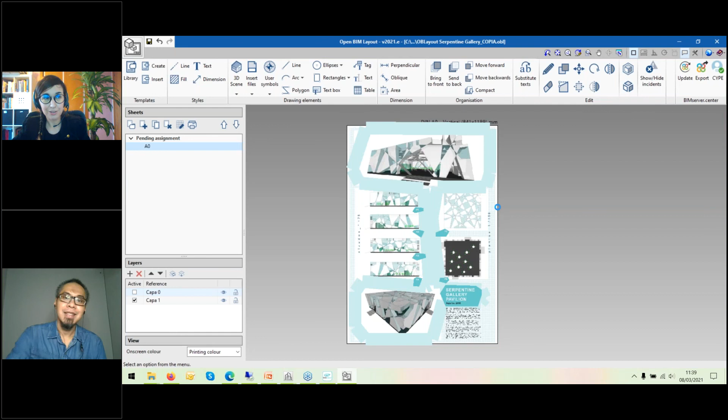Is it what you wanted to know? Come on, does that answer the question? Did I answer the question, sir? Yeah, okay, this for sure answers the question. Okay, any other questions, Vincent? I think that's all. That's all.

So the OpenBIM Layout makes all possibilities more convenient, right, Maria? So it can do anything in OpenBIM Layout, right? That's it, okay. And I think it gets more interesting when you add more and more information, like the building facilities and all of that, and you can combine only the things you want.